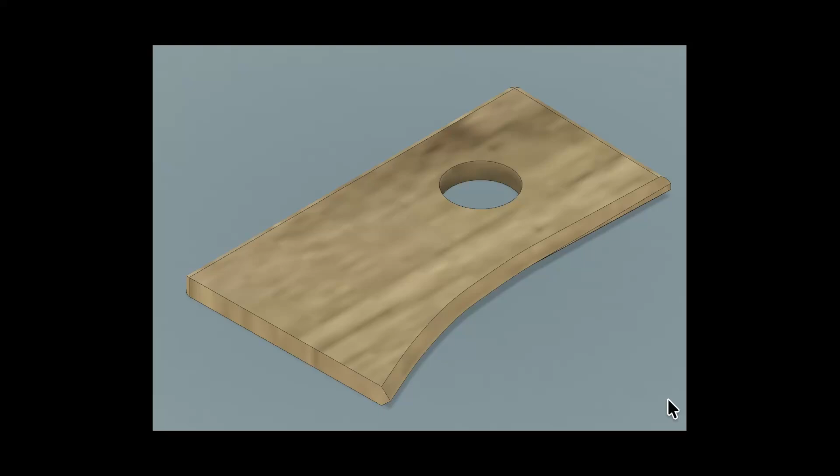Okay, when you first open up Fusion, you're shown a screen like this with all your projects in it. If you don't have a project, all you have to do is hit new. Fusion refers to the drawings, the file it creates, as a project, because that's what it's actually designed for - multiple projects. But in this case, we're just going to hit new, or click on the one that's been created. I'm going to click on a new one, and you're presented with this diagram. Now if you don't see this box, that means you've got the older version of Fusion and you should update.

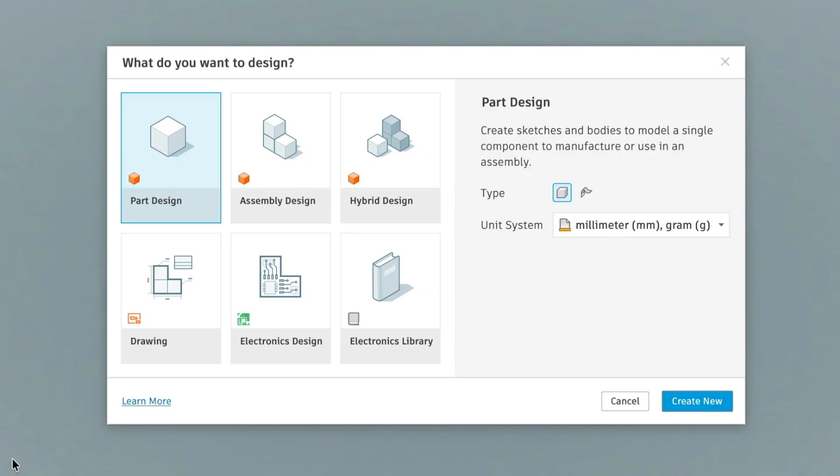In our case, we want to create a hybrid design. I won't go into details on why we choose hybrid at this point, but just take my word for it - that's the one you want to use. Then create new. Up here is your browser.

The document settings, you can change it from millimeters to inches. The hybrid design, you can change it in the future if you need to. You have named views, which we won't be using, and the origin - that's this little thing right here. XY plane, your XZ plane, and your YZ plane. In other words, this is the bottom, right side, and front.

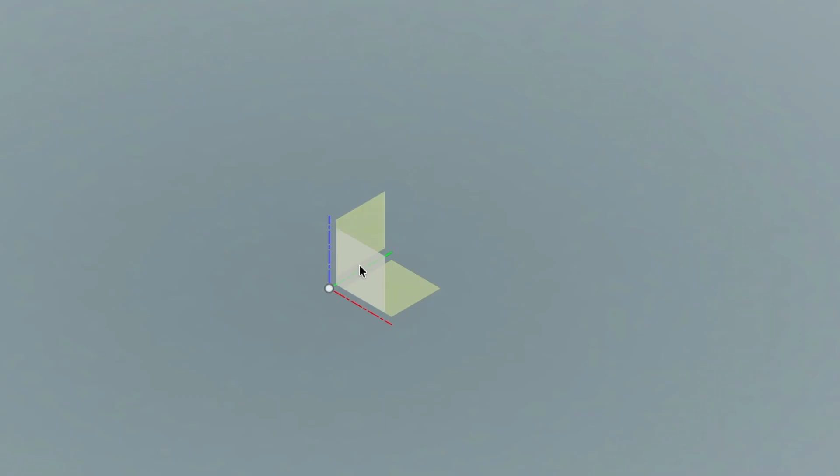So the first thing we're going to do is come up and save, and that will allow us to name our document. I'm going to call it ceramic rib. You can have different locations - you can put it in, like I've made new folders, new projects. So you can do the same if you're going to be doing a lot of them, or you can just keep it in the admin. Hit save, and now the file's name has been changed.

Now the first thing we have to do is create a sketch. This is how we manage it. But before we can do that, we have to import our image.

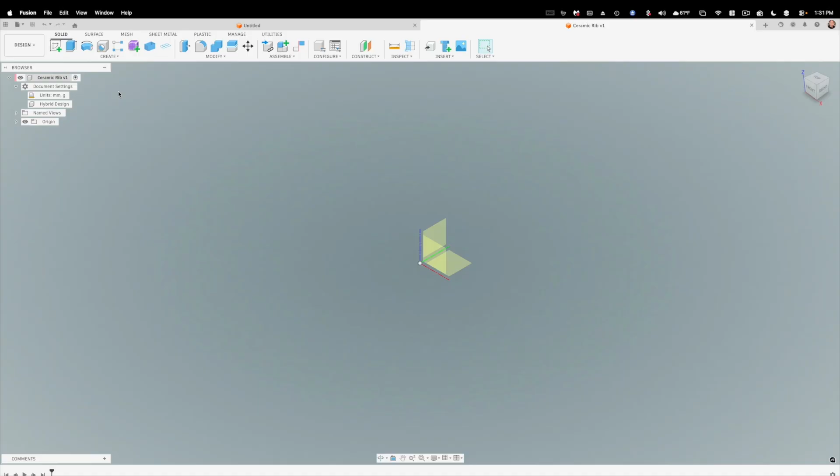So if you don't see these icons right here, and especially this one right here, just come up to solid and click on solid. These are all different types of environments in Fusion. We want solid. And you come over here and click on canvas.

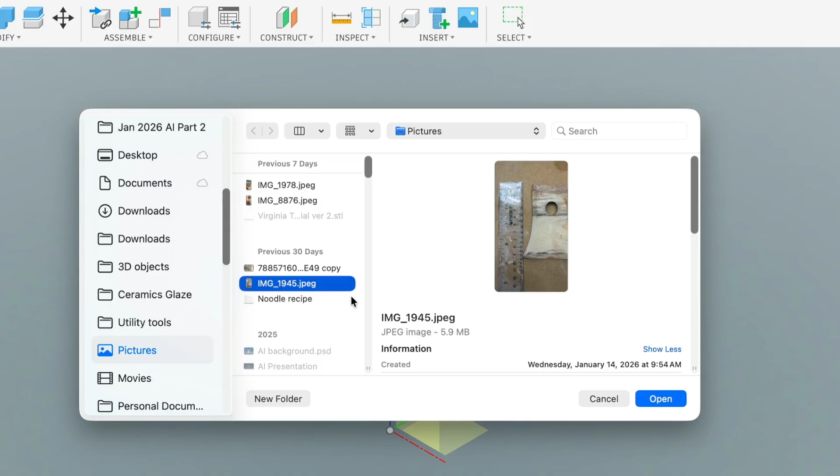What this does is import an image for us and place it on a canvas. I'm going to insert from my computer, then come over here to where I keep the image I want to import. In this case, it's in pictures, and it's this JPEG image down here. It can be JPEG, it can be PNG. We open it, and click the plane we want - it's almost always the down plane for making ribs.

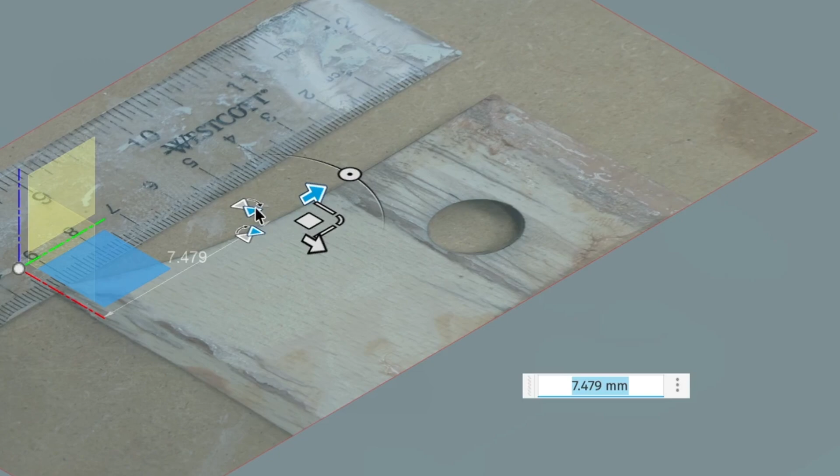Okay, so now I've got this image down here, and I've got these arrows - I can move it. I'm just going to move it there. So I have the image that I want, and I'm using a scroll wheel right now to zoom in and out. I want to have my image as close to the origin as possible. I'm doing a horizontal flip on it because I want to put the straight edge right there, just to make it easier to work with.

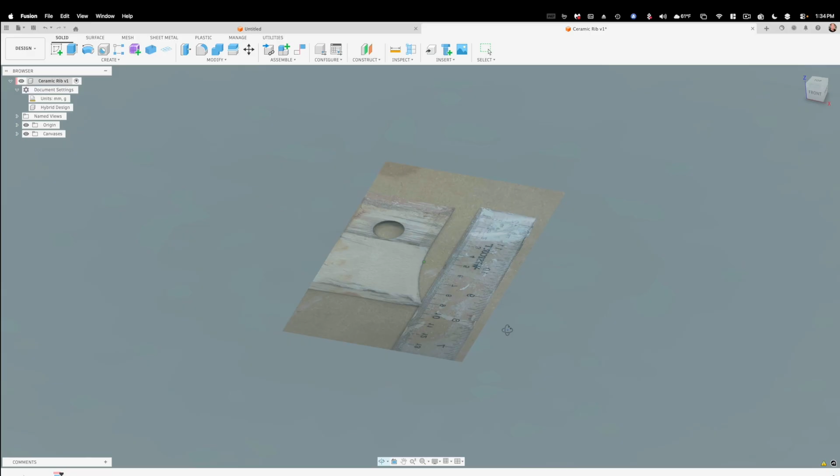You notice we have the ruler in here - that comes next. If you want to rotate it, you have to hold down the Control key on Windows, or the Command key on the Macintosh, with the mouse's center scroll button, and that allows you to move it. Okay, I'm going to stand it up straight like this, scrolling just a bit so I can see it, and to go up and down, hold the scroll button down.

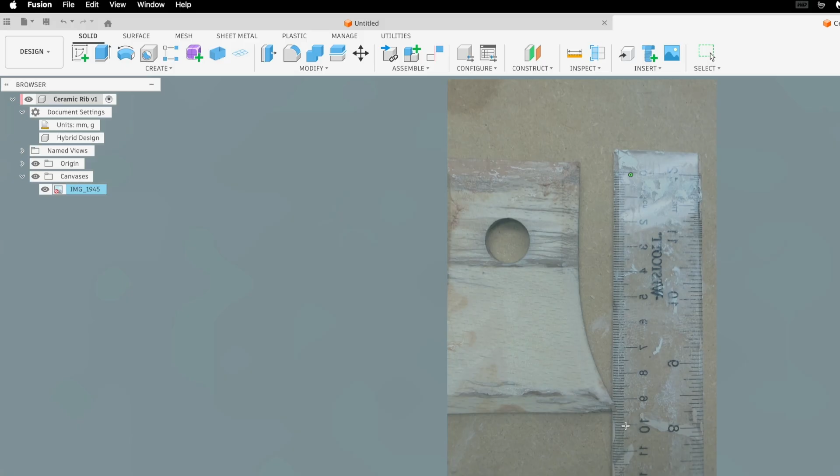Now I need to calibrate this image to make it the same size in Fusion as it is in the real world. To do that, I come over here on Canvas, right-click on the image, and hit Calibrate. It says click the first point on the canvas plane - well, that's right up here at 0. I go to the second point, because I know this is 100 millimeters, and I type in 100, and it automatically knows it's millimeters. That is the default measurement.

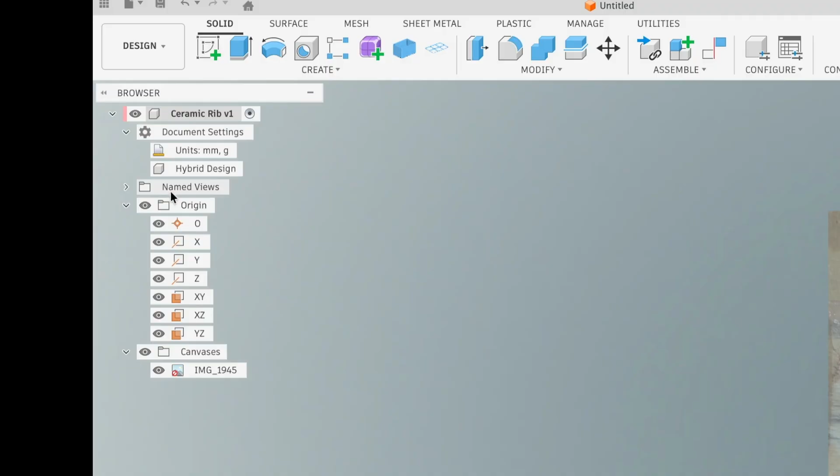And you notice it's gotten a lot bigger. That's actually good, because now we know it's the same size in real life as it is in Fusion. So the next thing I have to do is make sure my origin is turned on.

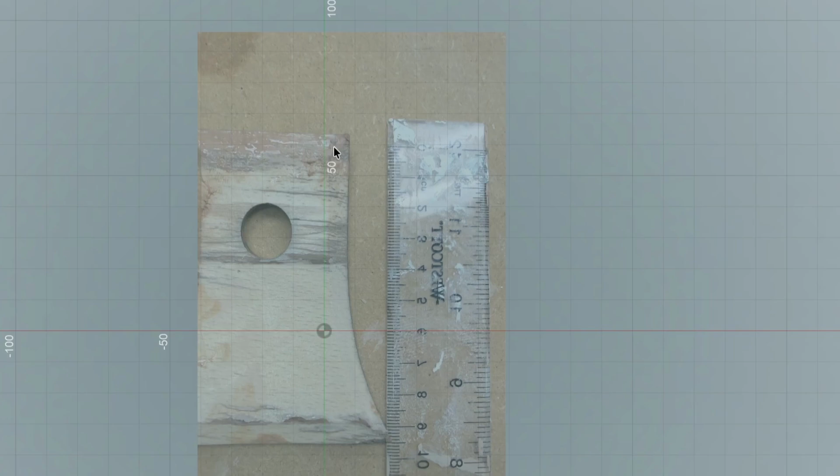Yep, it is, it has the icon up there. I have to create a sketch, and then choose which plane I want it on. You can see the planes right here, and I want it on that plane. You come over to the bottom plane, the same one the image is on, click that, and it changes into my sketch screen. We want to create lines here, here, and there, and then a gentle curve, and make sure we end on the point.

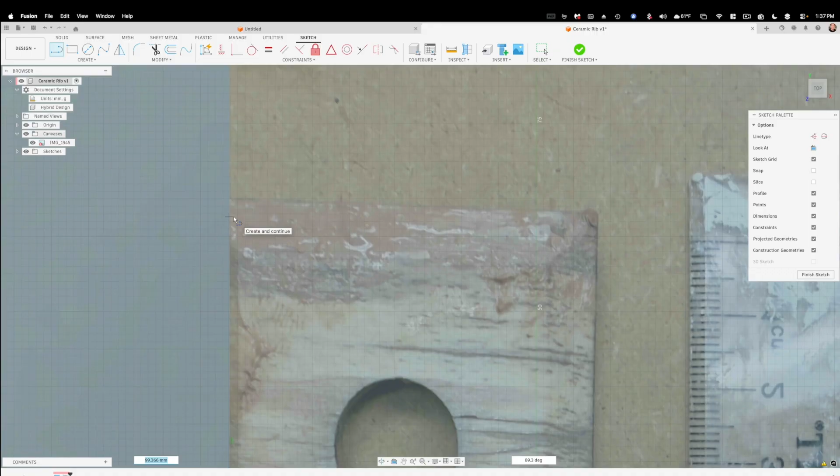Now, when I took this picture, the ruler was over the end of the rib, but that's okay, we can fix that. I want to create a line. I start right down here, click and drag, make sure it's even, come up to that point, come over to this point, slightly down, come back out, and come down here to just before it starts. To stop the line tool, I hit the escape key. I come in here and make sure that I'm right.

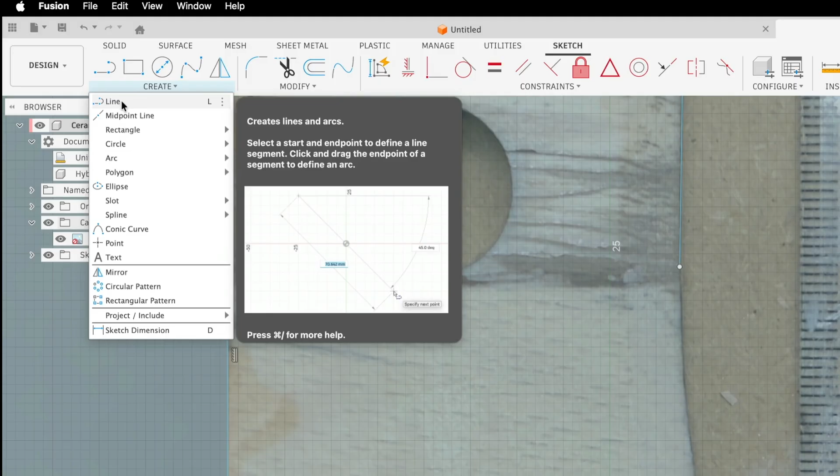Yep, I'm right on. So now to do this gentle curve, I come up and create, and you can see the different things. You can create a line, a midpoint line, a rectangle, a circle, an arc, a polygon, an ellipse, a slot, a spline, a conic curve, a point and text. I'm going to hit spline because this is the easiest one to fit these curves.

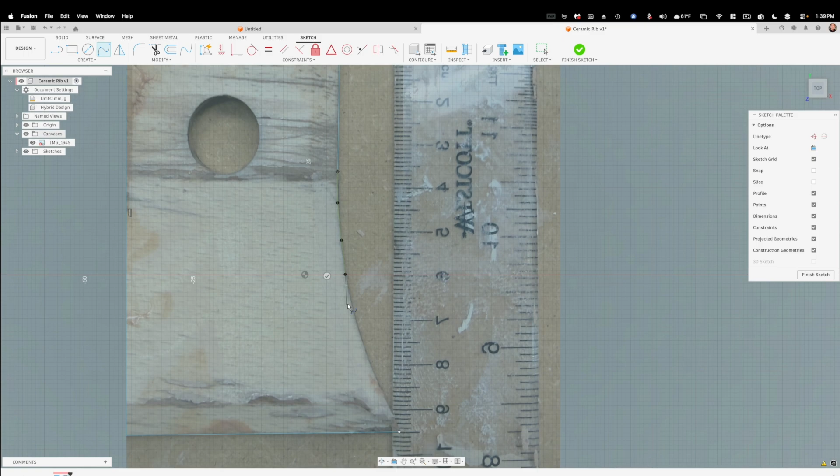So I'm going to hit fit point spline. Click on the last white dot, come down, come down, come down, and I want to zoom in now. Follow the curve, click twice, brings up the spline. If you don't click twice, the spline won't come up. And then I hit the escape key to get out of the spline tool.

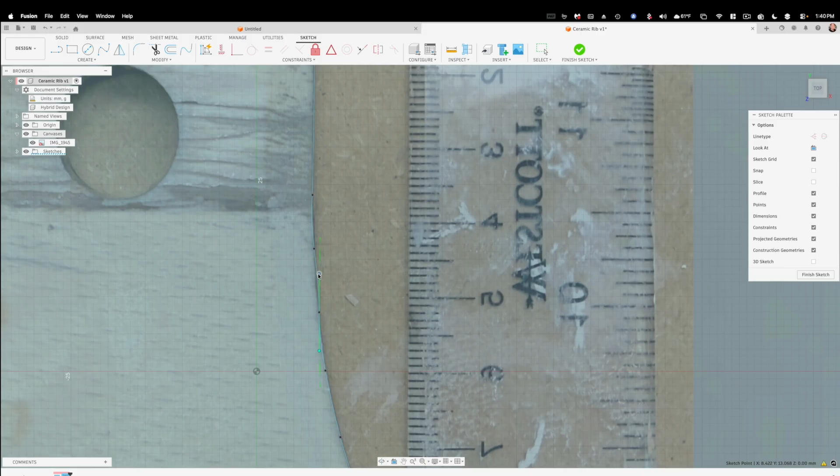And you notice these handles I have here? Well, I can come in and grab the point and move it just a bit so it fits exactly. If I have to adjust the curve, I can bring it in and out and adjust it so it fits exactly on the path.

If I've done it correctly and closed it correctly, I will see that there's a blue image there. And to see it better, I'm just going to turn the canvas off for right now. And you can see the blue image, that means you closed the image correctly.

And so I do need the canvas for one more thing. I want to put the hole in. To put the hole in, I just come over here and grab the circle, fit it in the middle, and draw the circle out. We're going to make it 18 millimeters, and I can type in 18 off the keyboard, and that makes it exactly 18.

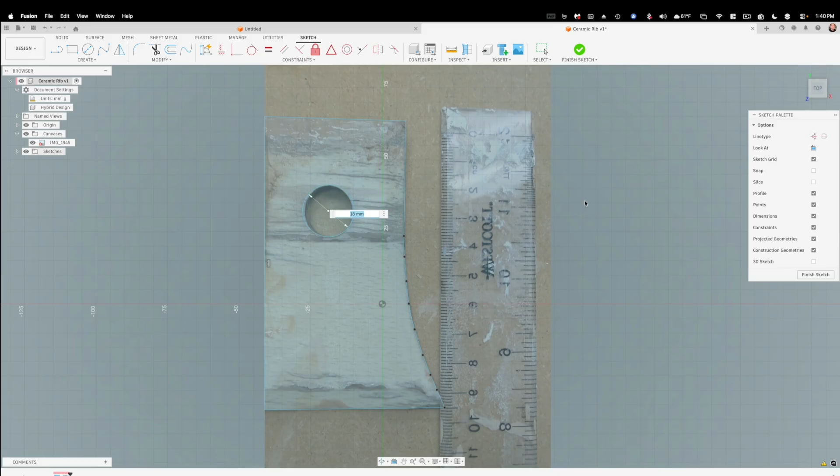If I want to change it, I double tap on it and put in a new value. Well, now that that's done, I have made my rib. Now I have to do something called extrude it, which takes it out of the 2-dimensional space and puts it into the 3-dimensional space. So I click on my sketch.

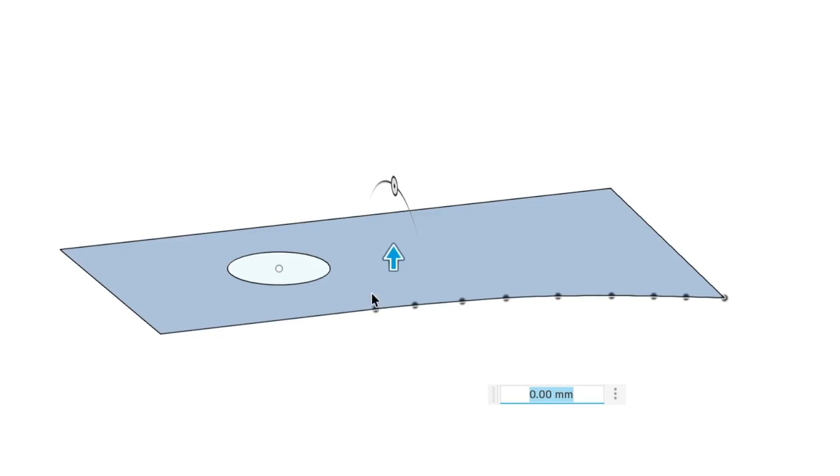I can turn the canvas off now. Click that and hit E. It automatically closes the sketch and puts us back into 3D space. I'm going to twist this just a bit so we can see it. You see we have this arrow right down here, and the center, the circle, is already cut out. So I just want to bring it up, and what I recommend is about 5 millimeters for a rib. And there we have our 3-dimensional shape.

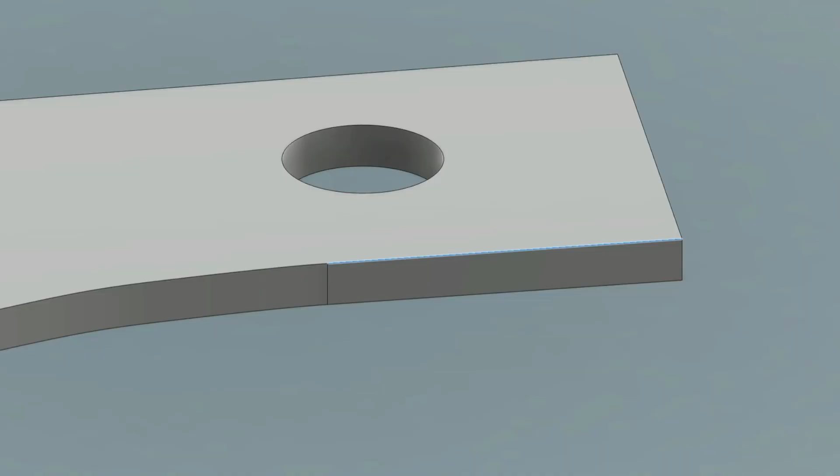Now what we have to do is put the edge on here, and we do that with something called a chamfer. So I'm going to select this edge right there, select that edge, and then come up here to modify chamfer. And I want to chamfer it 2.5, which is half of my height.

And then come over on this side, and I'm going to right click, edit feature, add another edge right here, and click 2.5, and it's done.

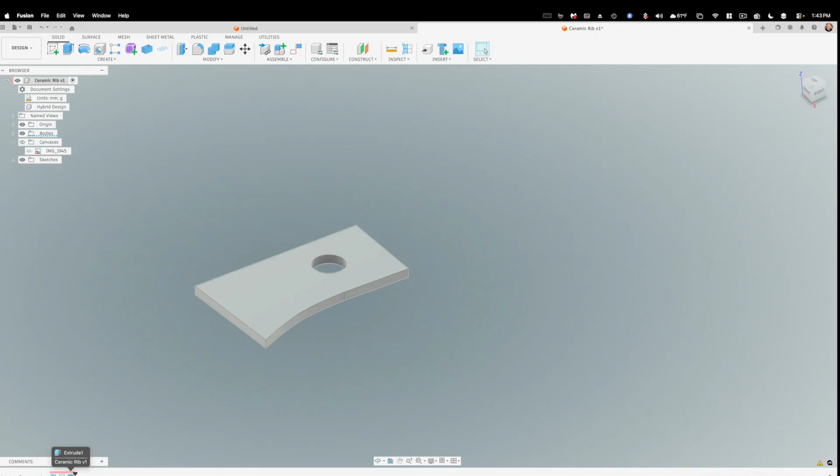So now that I've extruded it, I need to put in the bevel here. To do that, I'm going to select the curve line, come up to modify, select chamfer, type in 2.5. Yeah, and it looks good.

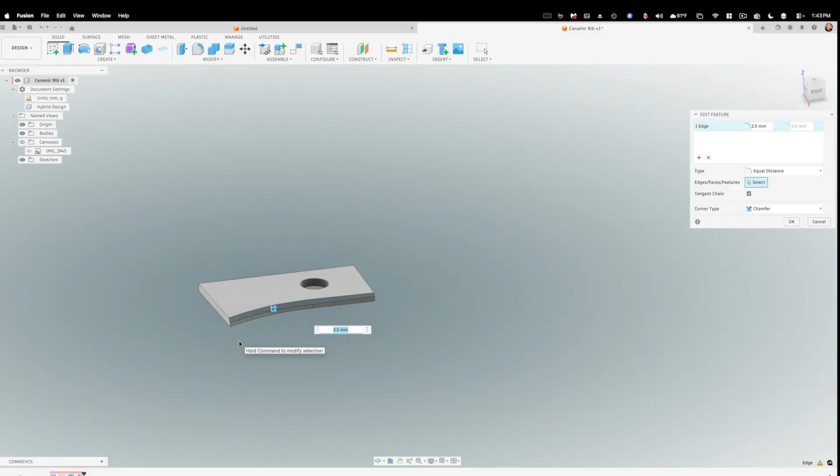Then I'm going to come down here and select this one, right click on this menu. I'll explain this bar down here in just a second. Edit feature, hold down the command key and click on that line. And now we have, you can see it, we have our almost, this side up here is not quite right.

We're not going to fuss with that right now because that won't affect the use of it. So now we have that. We want to come back up here and close this dialog box, and then soften up the edges so they're not so sharp.

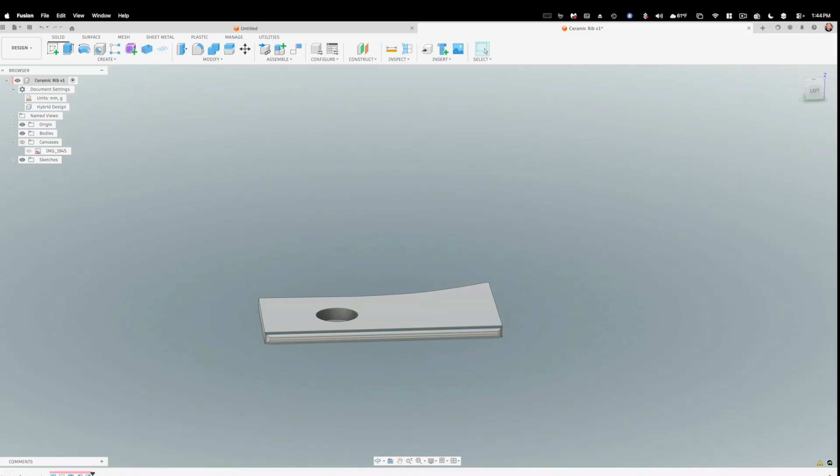To do that, we select this face, modify, fillet 2 is a good one, and that automatically curves that line. We'll come over here and do the same thing, select the 2 edges, do a fillet. That gives us what we wanted. Leave the bottom flat, and our rib is done.

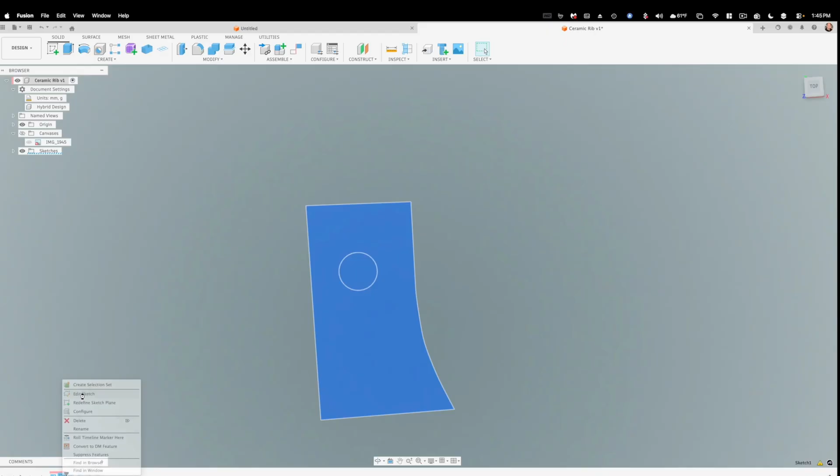Now, what this is down here is our timeline. So if you make a mistake, you can go back into anywhere in the timeline and fix it. Like if I need to change my sketch, I can come back to the sketch icon, click on it, edit sketch, and it allows me to come in and edit the sketch. I can move it forward, finish the sketch, and move it forward to any point.

This is my extrude. If I need to change the extrude, just edit the sketch, edit feature, and I can change the extrude. You can move this window over. Unfortunately, it doesn't remember where it was, so you have to move it in every project.

So you can go through here, and once we are done, we come up and do a save, and then we select the body, and it's created. This is the body right here selected. This is our canvas. We had sketches. This is the sketch we created.

Now we're going to export it, but we save it first. Every time you save, it creates a new version, so you can go back and pick up any version and work on it.

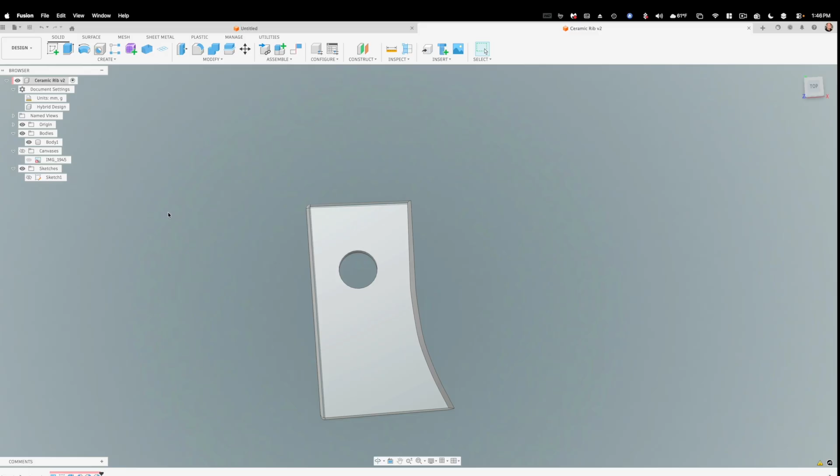So I come up here to File, Export. The default is for a Fusion 360 archive file. We don't want that. We want to come down here and select either STEP or STL. Either one works, I just happen to like STL better. The difference between the two is that a STEP is actually an editable format to bring it back in, but since I have this, I don't need STEP.

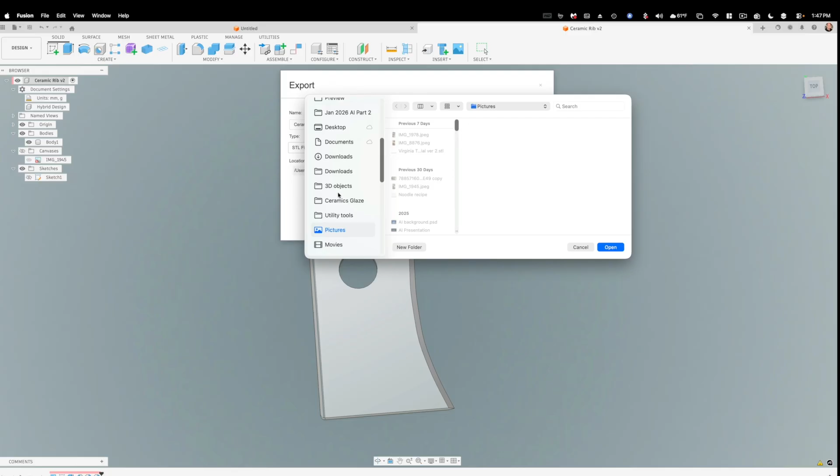I'm going to put it, click right here and get the file dialog box. I'm going to create a new folder under my 3D objects, and I'm going to call it Rib Tutorial. I create it, export it.

Now let's go in. What we're going to do right now is go over to the program I use to generate 3D printable files, and I'm going to create a new project. It'll be different on your machine depending on what you're using. I'm going to import, come over here to 3D Object. There's my Rib Tutorial. Open it, and there is my rib. And I'm just going to, so you can see, there it is.

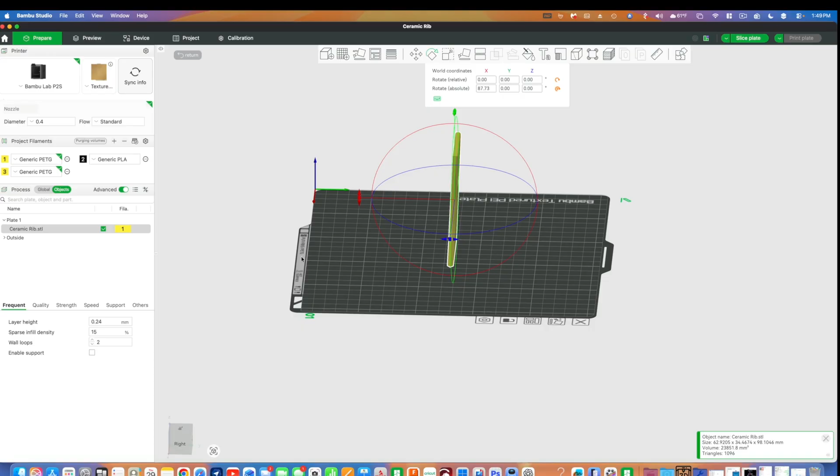Now it should be straightened up at an angle like that. Now when you go to print these, you should use a brim. Each of your programs is different, but what you're looking for is a brim, and that just puts a circle of plastic around it, so it will in fact hold up when it's printing like this. And that's all there is to it. Have fun.